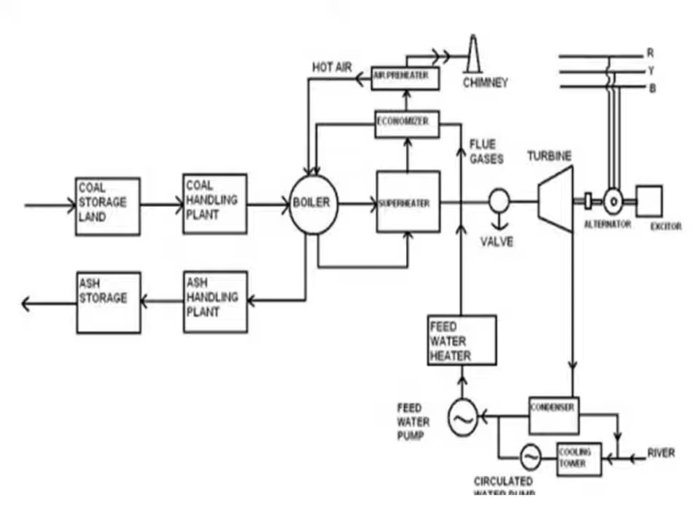And from river the fresh water is then added to this condensed water to give it as an input to the boiler through the economizer. So this is the summarized working of the thermal power plant.

Firstly, the pulverized coal, means the coal which is converted to fine particles, or you can say powdered coal, is burned in the furnace of steam boiler. Then the high pressure steam is produced in the boiler. This steam is then passed to the superheater where it is further heated up to increase the temperature and pressure of the steam. Then the superheated steam is given to turbine.

This turbine rotates, and in the turbine the stored potential energy is converted into the mechanical energy. The potential energy of the high pressurized steam gets converted to the mechanical energy. After rotating the turbine blades, the steam loses its high pressure, passes out of the turbine and enters into the condenser, as we have seen in the diagram.

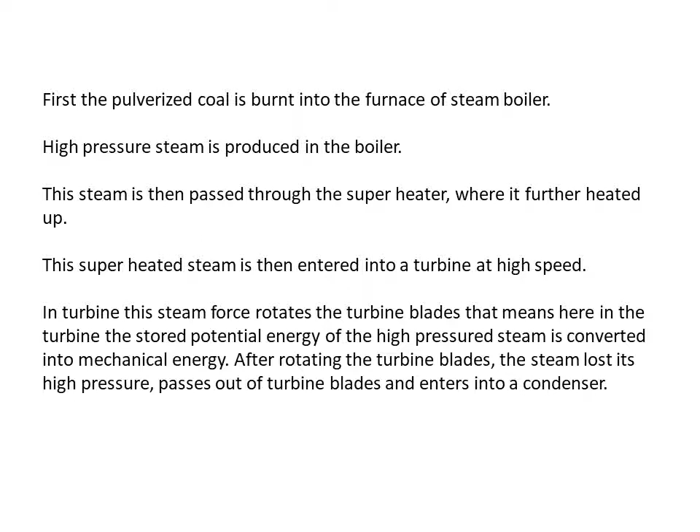In the condenser, the cold water is circulated with the help of a pump, which condenses the low pressure wet steam. This condensed water is then further supplied to the low pressure water heater, where the low pressure steam increases the temperature of its feed water.

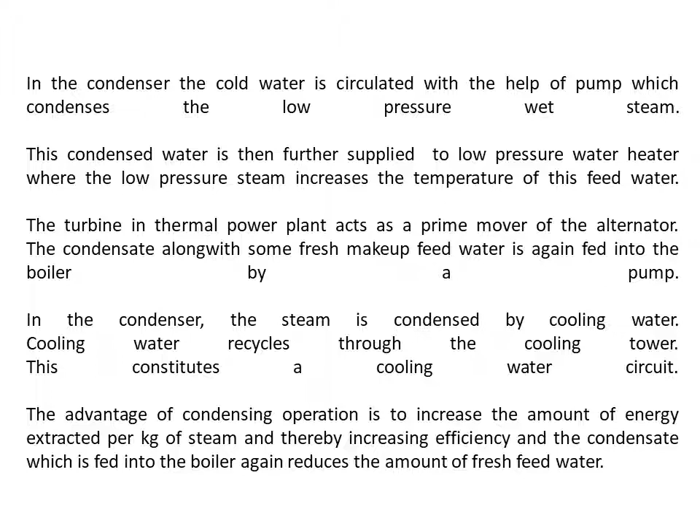The turbine in thermal power plant acts as a prime mover of the alternator or generator. The condensate along with some fresh water make up feed water, which is again fed to the boiler with the help of a pump. In the condenser, the steam is condensed by cooling water, as we have seen. Now, the advantage of condensing operation is to increase the amount of energy extracted per kg of steam and thereby increasing efficiency.

Now, these are main parts. First is boiler, which is used to produce steam from coal and water. Then superheater, which is connected between boiler and the turbine. It is to superheat the steam to increase the efficiency. Economizer, it is connected between boiler and the feed pump. It is used to heat the water before giving it to the boiler. It is again to increase the efficiency of the plant. Superheater and economizer both heat the steam and the water by using flue gases.

Then the turbine, its function is to convert heat energy of the steam into mechanical energy, which is then given to the alternator. So after doing the desired work of rotating, the steam exhausts at much lower pressure and temperature. The steam may enter in the turbine at the pressure and temperature of 1800 Pascal and 1000 degree Fahrenheit, but the temperature and pressure of the exhausted steam is 100 degree Fahrenheit and 1 Pascal respectively. So the exhausted steam is at much lower pressure and temperature.

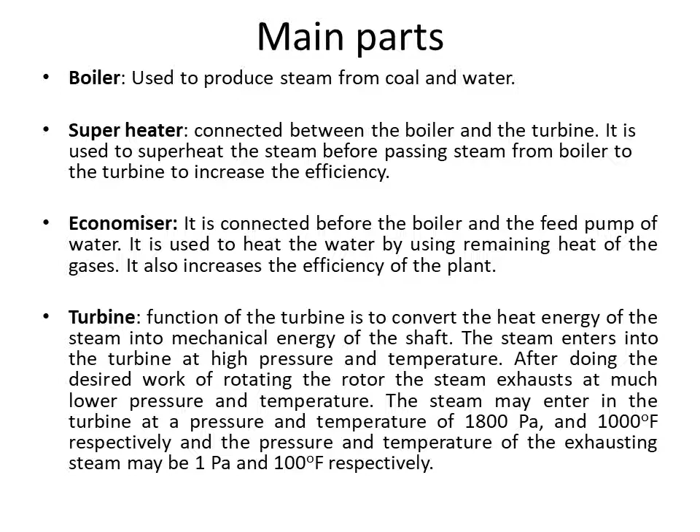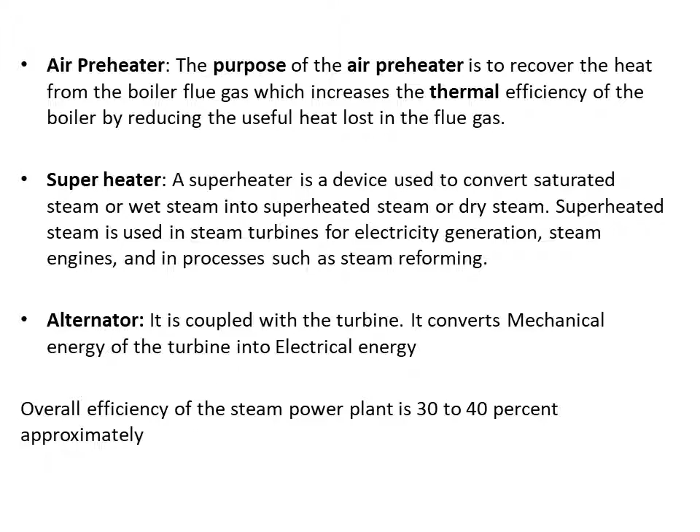Air preheater, as we have seen, its purpose is to increase the thermal efficiency of the boiler by preheating the air, means by heating the air before giving it to the boiler. Superheater, as we have already discussed. Then alternator, it is coupled with the turbine to convert mechanical energy into electrical energy. So the overall efficiency of the steam plant is very low. It is about 30 to 40% approximately. They are low efficiency plants.

Site selection. Thermal power plants must be constructed at such places where the cost of the land is quite reasonable. Plant is preferably located beside big source of natural water because we need water as a source to produce the steam. Availability of huge amount of fuel at reasonable cost, it must be available there. Plant should be established on plain lands. The soil should be such that it should provide firm foundation for plants and building.

Location should not be near to the dense locality because they produce lot of pollution. There must be ample scope of development of future demand. Tall chimneys should not obstruct the traffic of airships. These are some points to consider while selecting the site for thermal power plants.

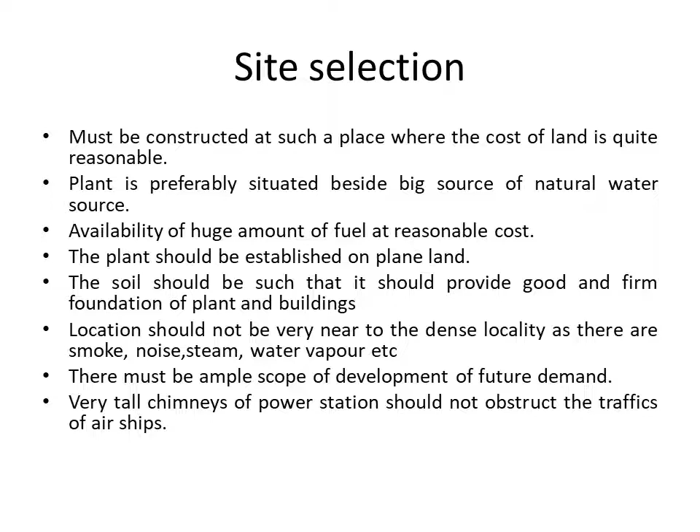These are advantages of thermal power plant. Fuel which is used here, that is coal, is cheaper. Less space is required as compared to hydropower plants, because in case of hydropower plants, large dams are required. So these plants are possible to install near load centers. This is not the case with hydropower plants. They are at far away places from the load centers because mainly they are constructed in mountainous regions due to the construction of the dam.